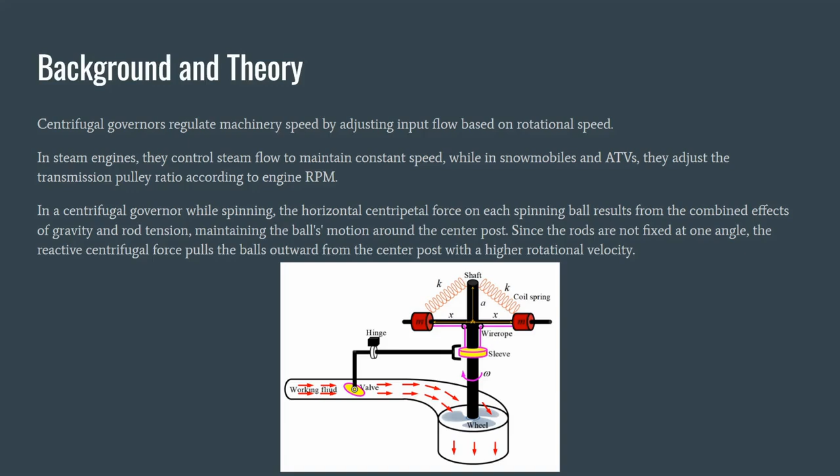In summary, the flyball tachometer embodies a principle central to mechanical engineering. It provides a direct and intuitive way to measure angular velocity using only mechanical and physical principles.

Now that we have established the theoretical foundation, let's transition to the design of our flyball tachometer. This project required careful planning and precise execution to ensure the device operates efficiently and accurately. Let's start with the main components of our design.

First, the counterweights. Each counterweight is 100 grams, providing the necessary mass for generating the centrifugal effect as the tachometer spins. Next, the bevel gear. To control the speed of the system, we implemented a 1:4 gear reduction ratio, meaning for every 4 rotations of the motor, the flyball assembly completes just 1 rotation. This limits the maximum speed of the tachometer to a manageable range of 0 to 3000 RPM.

Next, the spring mechanism. The spring plays a crucial role in balancing the centrifugal forces, providing the necessary tension to counteract the outward movement of the balls, creating a direct relationship between the displacement of the spring and the rotational speed.

Next, the ultrasonic sensor. To measure this displacement with precision, we integrated an ultrasonic sensor. This sensor detects the linear movement of a measuring stick attached to the flyball assembly, translating the physical motion into RPM data. Next, the tachometer frame.

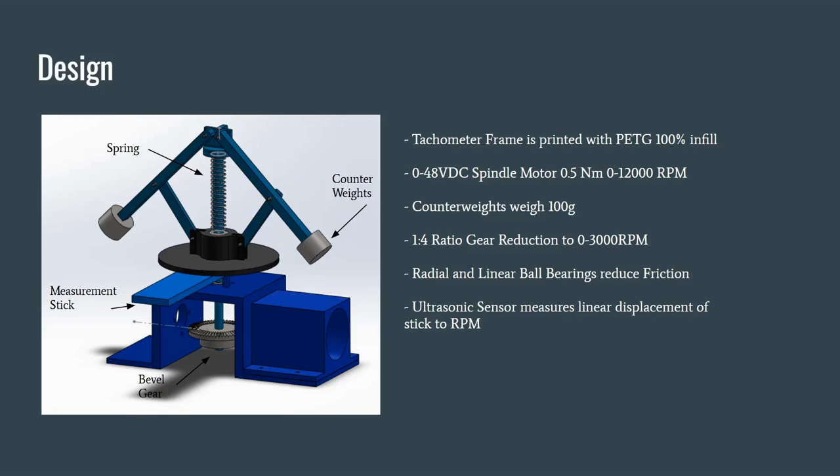Okay, so here I'm going to play a video of our tachometer working. Like 1.1 volts.

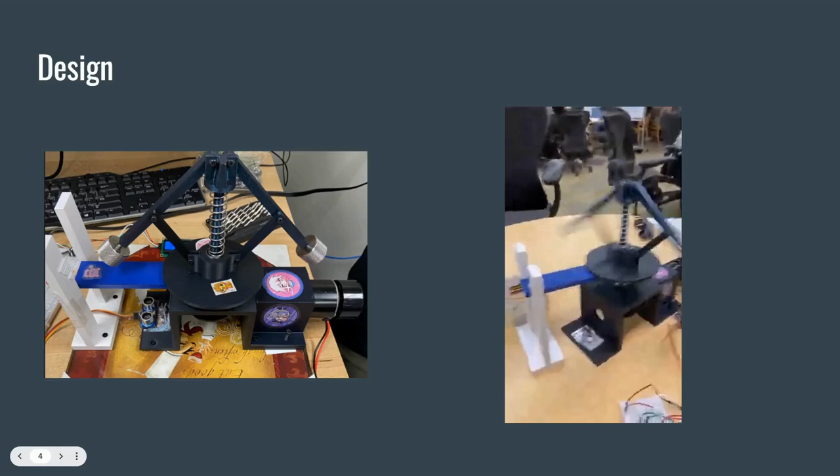On the left here, you can see our physical design of our tachometer with a 3D printed white stand to act as a ruler to measure the RPM. Like 1.1 volts.

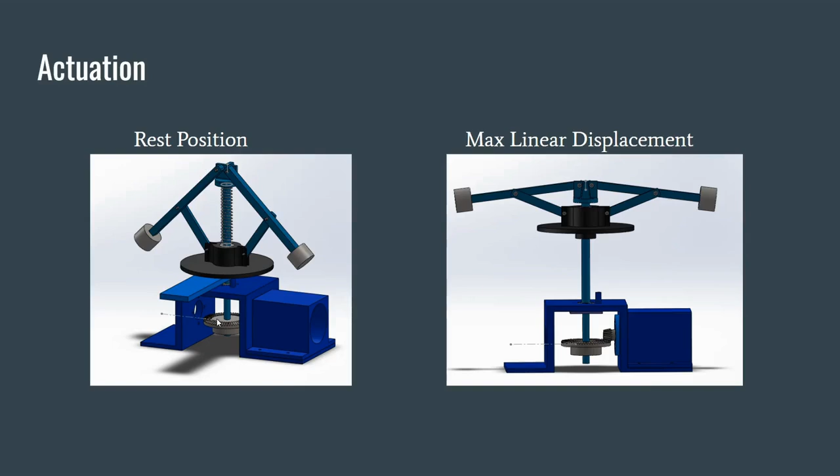Here's our actuation. As you can see on the left is our rest position. This is without the motor at 0 RPM and at rest. And on the right is the max linear displacement of the system.

In the implementation and data collection slide, we're looking at key aspects of our data collection implementation process. First, our nominal sensor reading, or our linear displacement offset, starts at 62 millimeters according to the ultrasonic sensor and spans a range between 0 to 2 volts. This will provide us a baseline for our measurements.

Next, we use an ultrasonic sensor to measure linear displacement. This was done at 0.5 volt increments as our motor is very powerful and would spin incredibly fast, so we needed a lower increment of voltage to help us capture precise changes in displacement.

One important aspect to note is that there's still a bit of spring clearance on the tachometer. This means that as the tachometer initially starts spinning, there will be no compression, because there's still a little bit of linear distance before the spring meets the top of the tachometer before it can start resisting or compressing.

Our table here presents our collected data. As the voltage increases, we can observe how the displacement in millimeters and the RPM values change. At 0 volts, the displacement is 62 millimeters and the RPM is 0 — this is our offset. As we increase the voltage in increments, we see corresponding increases in both displacement and RPM. For example, at 1.5 volts, the displacement increases to 69 millimeters, and it's more consistent over time.

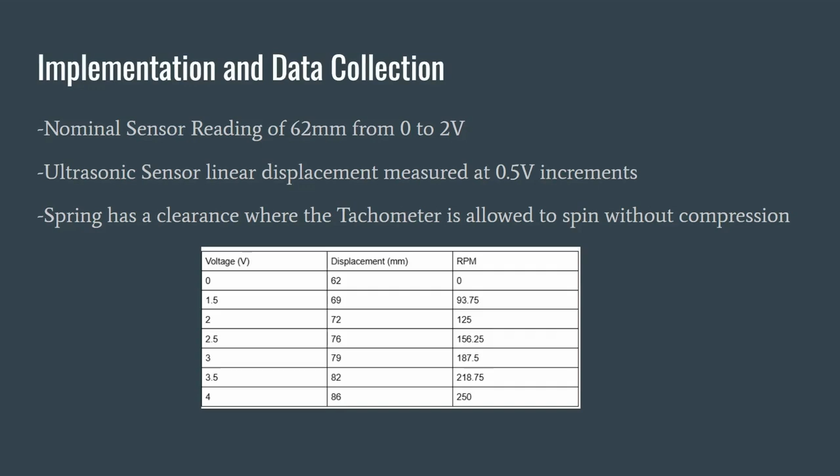Each increment of 0.5 volts shows an increase of about 3 to 4 millimeters of displacement, of course with a linear relationship with RPM. By the time we reach 4 volts, we have a maximum displacement of 86 millimeters at an RPM of 250. This data forms the foundation for analyzing the relationship between voltage, displacement, and RPM.

We have a slide that illustrates the calibration process and the relationship we established between voltage, displacement, and RPM. The blue line on the graph represents the relationship between voltage increase and displacement increase, while the red line represents the relationship between voltage and RPM. These relationships were developed based on our collected data.

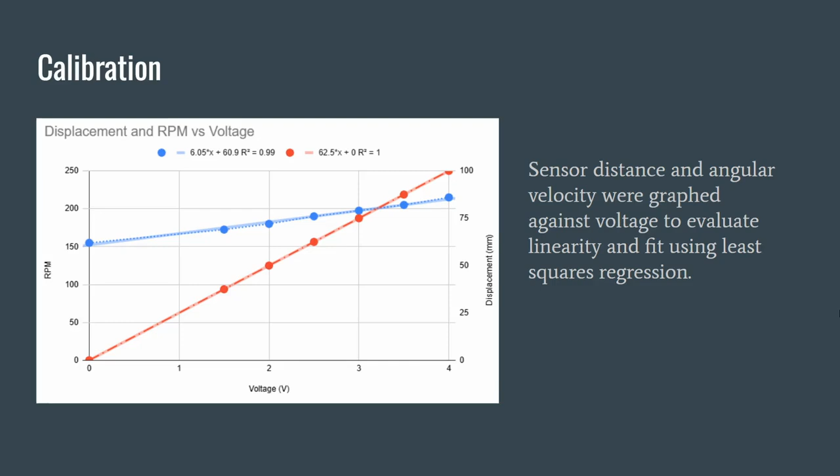Using least squares regression, we confirmed the linearity of both relationships. For displacement, the blue line, the equation of the slope is 6.05x plus 60.9, with an R squared value of 0.99, indicating a very strong linear correlation. For RPM, the equation is 62.5x, with an R squared value of 1, showing a perfect linear fit.

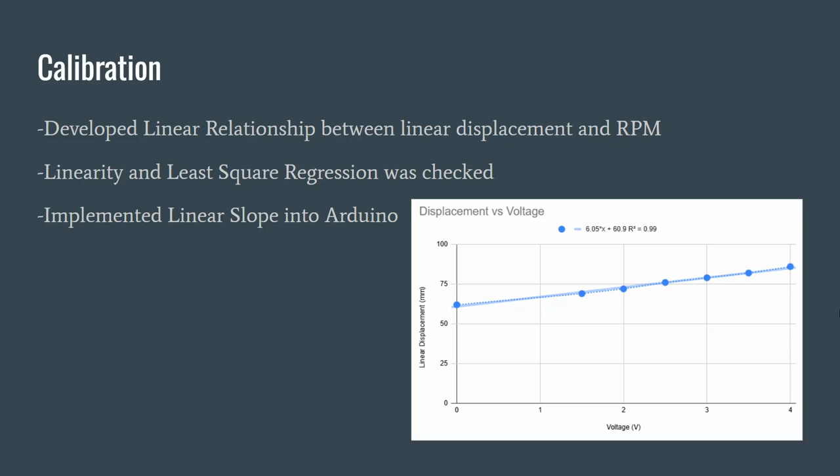On the next slide, the slope was implemented into the Arduino. As you can see here, just the linear displacement versus voltage relationship was implemented to the Arduino to calculate how the displacement will affect the reading on the electric LCD screen.

Since our spring constant was 1.66 newtons per millimeter, our maximum theoretical RPM was 400 RPM. During operation, our shaft experienced some wobbling due to the press-in bearings being too loose. Also, measuring the RPM mechanically through the stick and ruler wasn't very accurate due to the vibration and viscous effects from the bearing. All right, next slide.

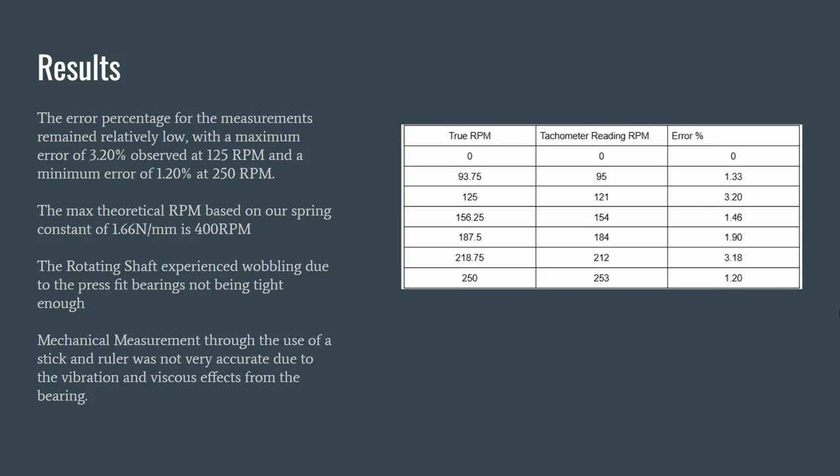In conclusion, the flyball tachometer proved to be a way to measure RPM mechanically without relying on electronic instruments. In our design, we used an ultrasonic sensor to measure the lift of the tachometer, and that proved to accurately measure the motor's angular speed.

However, during operation, the tolerances from the 3D printed components caused some wobbling. To fix that, we used extreme press fits. Due to the wobbling, the sensor readings also fluctuated, so we averaged the readings and improved the calibration procedure to yield more precise findings.